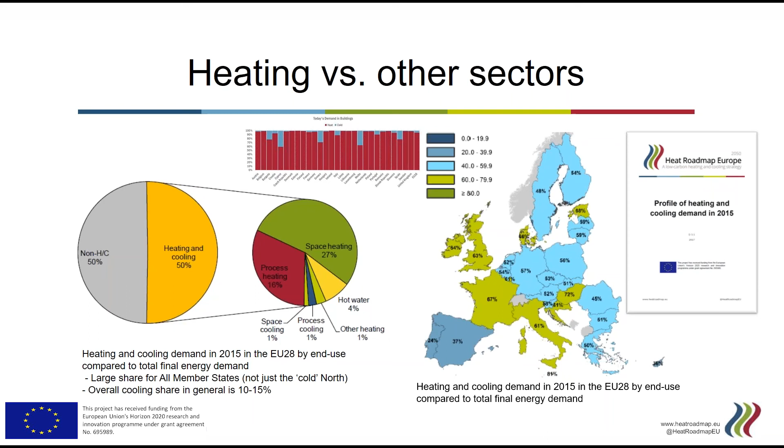Also, what is interesting to see in our initial mapping is that the cooling share in general is lower than what you would expect. Also, in those countries where you actually use a lot of cooling, we have, for example, Cyprus or Malta or Greece with rather high cooling demands, but still, even in these countries, heating is actually higher. You can go onto our website and learn more about your country. So that was the status.

And then the question is, what is it actually that we're looking into in the future? In the European Union, in member states, and in cities across Europe, we are trying to align to some long-term targets within the debate about climate change. And it's clear that the European Union put the target of 80 to 95% reductions in the CO2 emissions from the energy sector.

Then there are also short-term targets, and we have in what's called the Energy Union 5 different focus areas. One is the security of supply, solidarity, and trust within the European Union, and this is mainly focused on gas, oil, and electricity. The energy efficiency first principle, and then we have the aim of having lower CO2 emissions, and also research and innovation within, for example, energy storage or the SET plan, and these kind of elements.

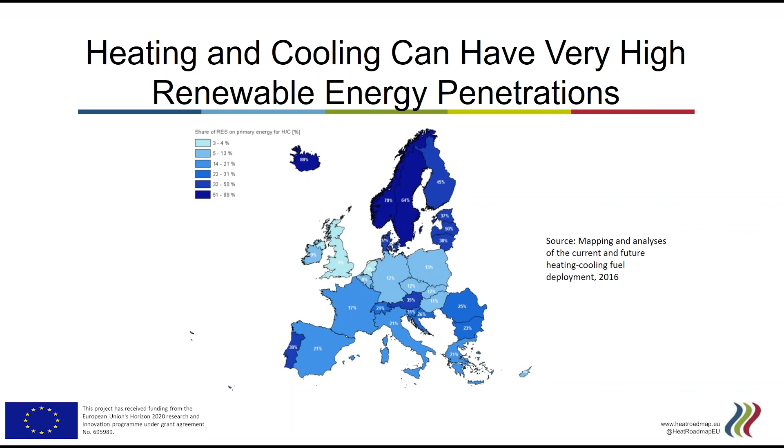If you look at the statistics, there's also a clear tendency that those countries that have larger shares of district heating are able to diversify the heat supply and have more renewable energy within the heating system compared to those countries that have low shares of district heating.

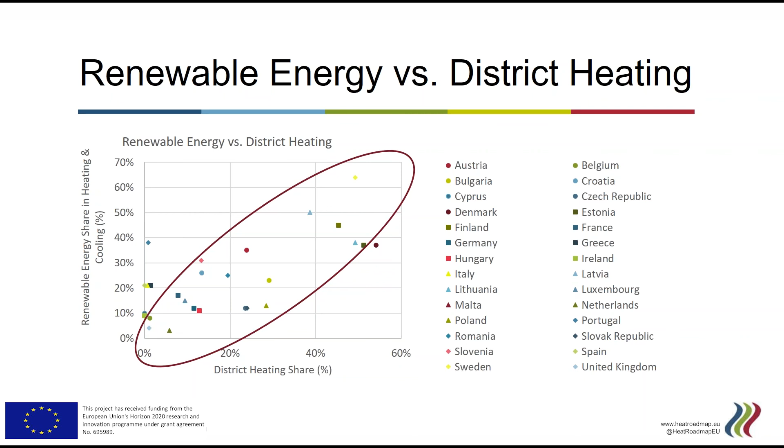So why is the heating sector and cooling sector so hard to change? Well, some of the things are connected to that heating is rather complex. You cannot simply change the legislation around the heat market as you are doing it with regards to the electricity market. Also, heating is tied up in large investments, in individual investments in buildings, which means that it requires a complex set of regulatory measures to actually address the heating and cooling sector.

Also, heating is very local, which means you have to have some local action. To have local action, you need also to have handles or some framework that you can work on the local level. Heating is long-term, meaning that if you make an investment, you will have to live with that investment for quite some time. Heat savings and district heating, for example, have very large investment costs, and this means that you have to have some security for the institution, utilities, companies who have to invest in that. For the heat savings, the building owner needs some kind of framework to invest in savings at that time when the building is being renovated anyway.

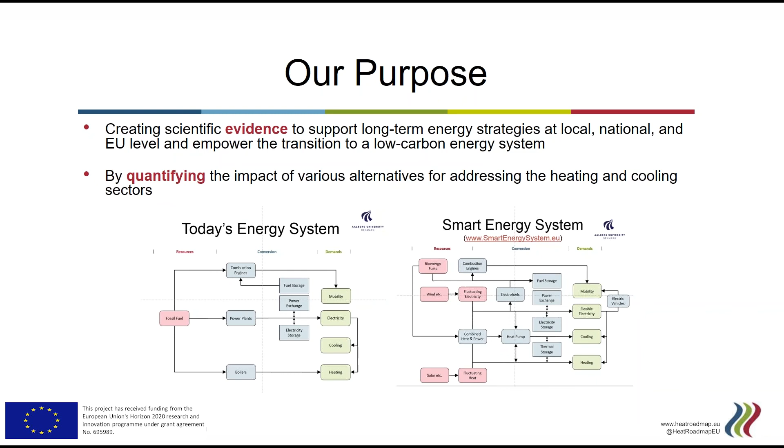This means that in Heat Roadmap Europe, to some extent, we go from the current challenges and overall energy system, which is a high level point of departure. Then we try to dig in, provide knowledge and data and analysis on a rather detailed component, technology, country level, also providing maps for a significant part of Europe. And then we end up also using this detailed knowledge to have some overall results that can be used at a national or EU level.

By having this approach, we're sure to have credibility regarding the data, regarding the analysis. We can provide knowledge on the very local level, but we can also then use this on the national or international EU level to have results for the scenarios going towards 2050.

The objective is to remove some of the barriers that we see in the heating and cooling sector by providing and quantifying what is possible. By using this data and knowledge, we try to open up the minds and markets, and we build hopefully new capacity and skills by also getting our results throughout the European Union in different workshops across member states.

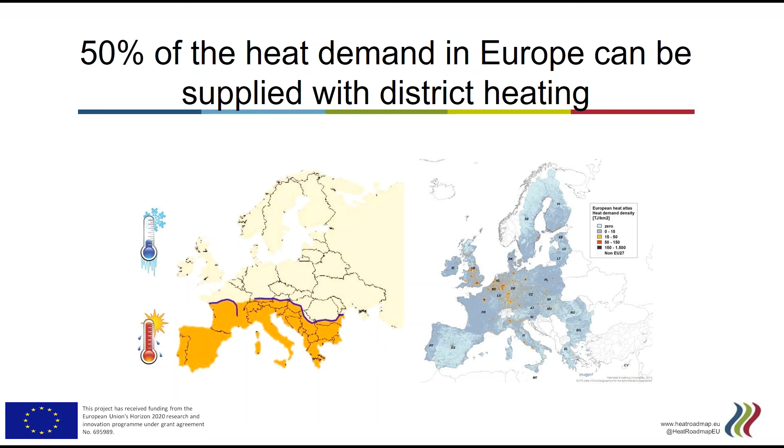When we look at the data, it is also clear that heat demand is not only in the north of Europe, it is also in many places and significant. When we look at cooling, this is not only in the south, this is actually also in the north. And the reason is that this is connected both to climate and to the different types of buildings that we have around Europe, which are different within the different member states.

Another key result from previous studies is that we have more excess heat in Europe than all of the heat demand in the different buildings. This means that theoretically, it is possible to eliminate all the use of gas or fossil fuels or electricity within the building sector if we were able to extract or collect all the excess heat and supply the buildings. Of course, this is not possible, and this is why we try to combine our knowledge regarding the energy system and the data for the heat supply with our GIS and energy mapping.

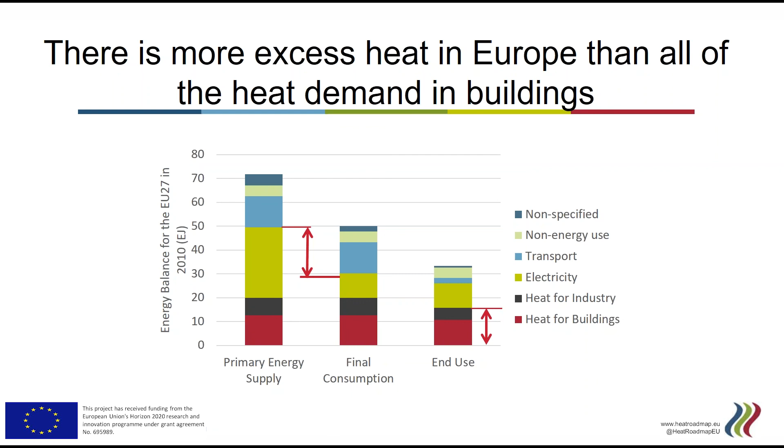Energy efficiency is certainly an important element of the heating and cooling system, but it is also clear that there is in the future some kind of balance between the cost of making further savings and the cost of supplying heating or cooling. And this is the balance that we have found for the overall European level, which is 30 to 50% savings on the heat demand across Europe. And there are no previous results for selected member states. But in this project, in Heat Roadmap Europe, we will provide this type of knowledge.

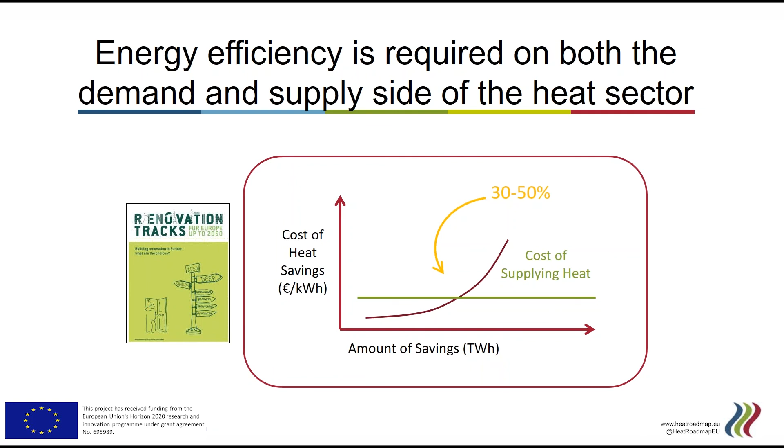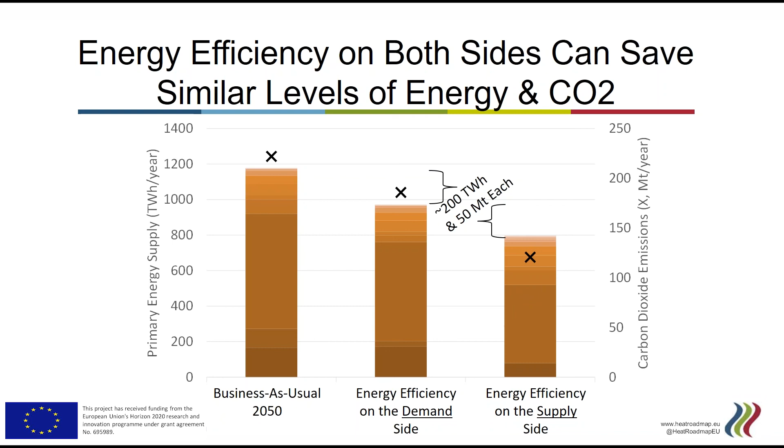When we start to combine what we call energy savings at the building level with energy efficiency by using excess heat, we can also see that there are similar savings on the primary energy supply by saving energy within the building and by providing heat in a more efficient way. This means that a combination of both doing energy savings at the building level and having a different energy system design can provide equal amounts of fuel saving. If we then are saving fossil fuels, we can actually save equal amounts of CO2 as well.

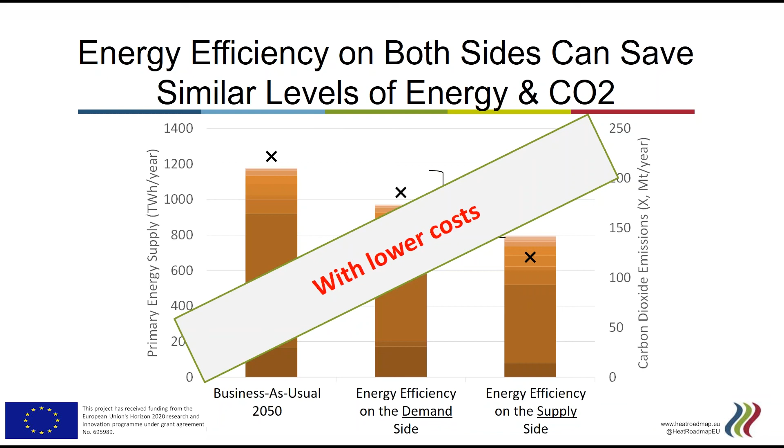The positive thing here is that if we redesign the system and combine all of these elements, we can significantly reduce the cost of the energy system as such, and certainly the cost of decarbonizing our heating and cooling supply.

So the previous results show that we can reduce the energy consumption significantly, reduce the imports of fossil fuels to the European Union. We can reduce carbon dioxide emission and reduce the energy cost while increasing renewable energy and potentially increasing the number of local jobs within these sectors.

We have found this in the 3 previous Heat Roadmap Europe studies, where we have been moving from illuminating different possibilities within using local heat sources through district heating, combining a comprehensive heat strategy with energy savings, and now in the 4th study here, we're moving into low carbon heating and cooling strategies for the 14 member states.

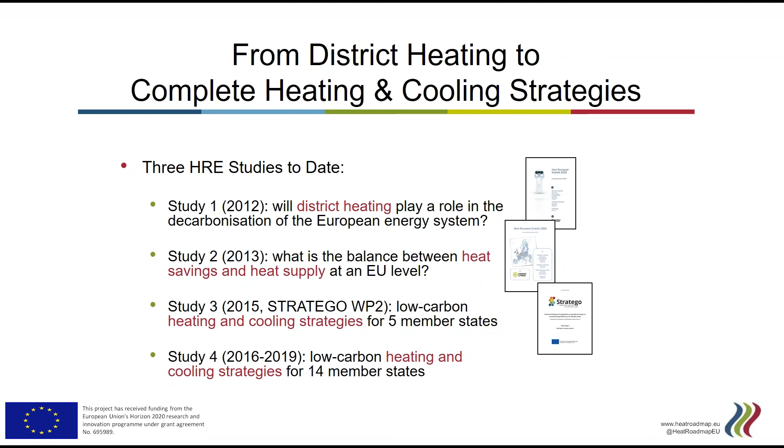So what we try to do is on the very local level is to quantify the energy consumption, the energy costs, and the carbon dioxide emissions. And as I said, the key results will be pathways towards 2050 about what should be done technology-wise, and to what extent there is a balance between using individual solutions, district heating solutions, gas solutions, and energy saving solutions within the building sector.

This requires some substantial data and mapping, where we then have a large focus on looking at the potentials to save energy within the building sector and the cost of making these savings. We combine that with looking at maps and identifying different potentials for district heating. We look at the heat sources that we can use locally, and then we identify that on an energy system in order then to make energy system analysis to create detailed hour-by-hour scenarios and strategies on the different member states.

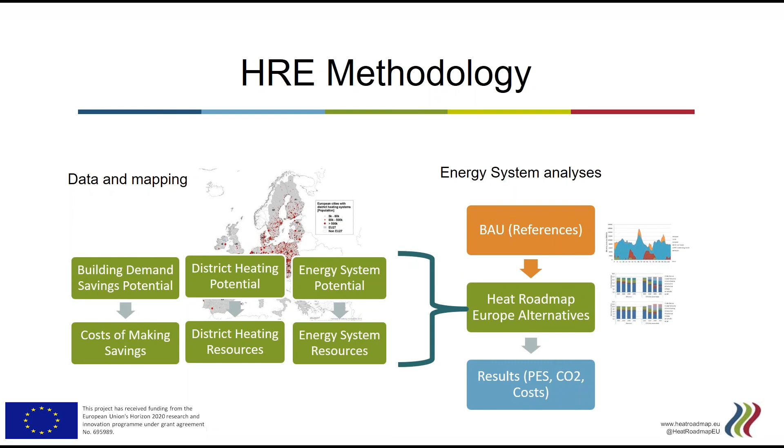Within the project, we have a complex relationship between different energy models. We have some energy models that look at the heating. This is the PETA, the Pan-European Thermal Atlas, and it's the forecast model where we look at buildings and industry in a transition. And then we have another set of tools or models which is looking at the energy system in great detail, which is the JRC EU Times model combined with the EnergyPLAN hourly energy system analysis model.

Using this, we can look at both single years, which is what is being done in the mapping and in the EnergyPLAN tool. We can also look at the transition between 2015 and 2050. And then by combining all of these different tools, we're able to make comprehensive, detailed roadmaps. Now I'll try to make some examples for you about what it is that we're actually trying to address.

Here is an example of the energy mapping, and here is a map of the Netherlands. And what we provide on our webpage is the Pan-European Thermal Atlas, where you can look at the heating and cooling demands in an interactive web page where you can zoom into your region or city or country. So these are some of the layers in the mapping. We also have mapped the different renewable energy heat sources, for example, potentials for solar thermal, bioenergy, or geothermal.

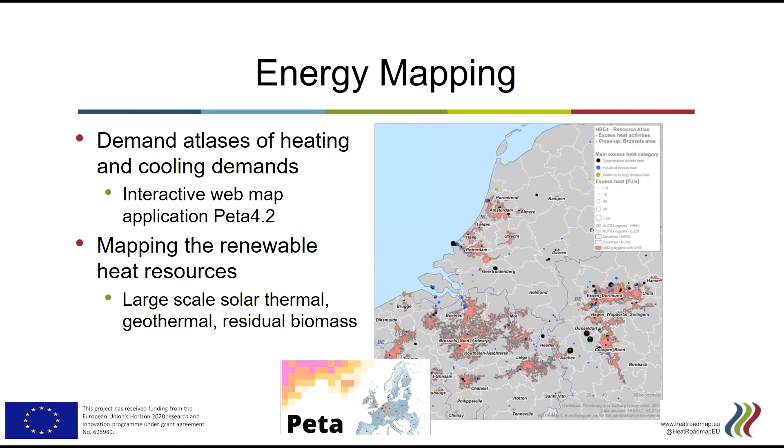And if we zoom in a bit, we can see here how this looks on an example for how much district heating is used in the different settings across Europe. Here on the right, you see Copenhagen with more than 90% district heating, and London with 5% district heating. And on the map, it's not district heating that is looked upon, it is actually the energy density in the cities.

So what you can see in the purple is parts of the city, 100 by 100 meters, where you use more than 300 terajoules per square kilometer. And then the red dots are areas where you use above 120 terajoules per square kilometer. And this changes how feasible it is to do energy savings, how feasible it is to do district heating.

And immediately what is striking when you start to look at these maps is that there are really huge similarities across Europe regarding the heating and cooling demands, but there are also huge differences in regards to how much renewables and what kind of solutions there are across the different member states.

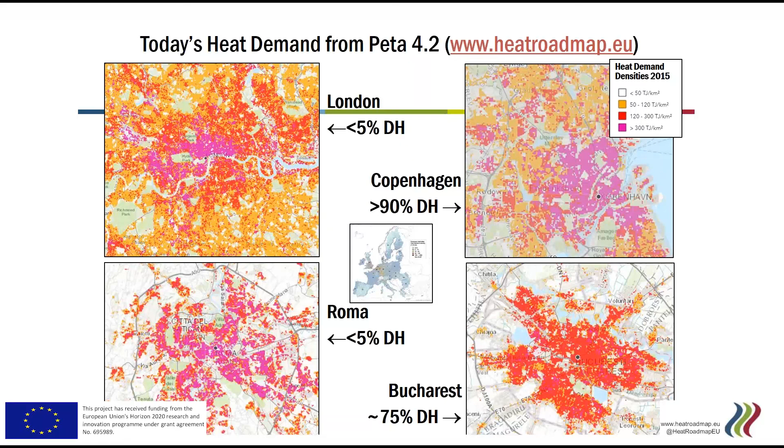Another example of some of the key results already obtained is here from the Pan-European Thermal Atlas (Peta) maps, an example from the Netherlands. Here we can identify heat demands of around 300 petajoules per year, and we have excess heat in the Netherlands to actually cover almost twice that much.

Of course, this excess heat is concentrated in a few areas, and you can go into our maps and identify whether your area has a large excess heat potential. But looking at the overall level, it is counterintuitive that a country like the Netherlands does not have a higher district heating share, knowing that the excess heat is so extremely high.

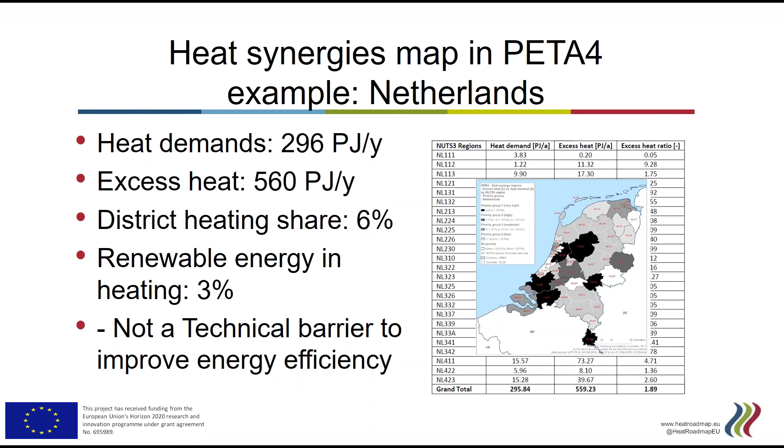Another part of the energy mapping is the possibility to use what we call the heat synergy regions, meaning areas with a large demand of heat and a large potential for excess heat sources, and to look at how much the costs actually could be for creating new networks.

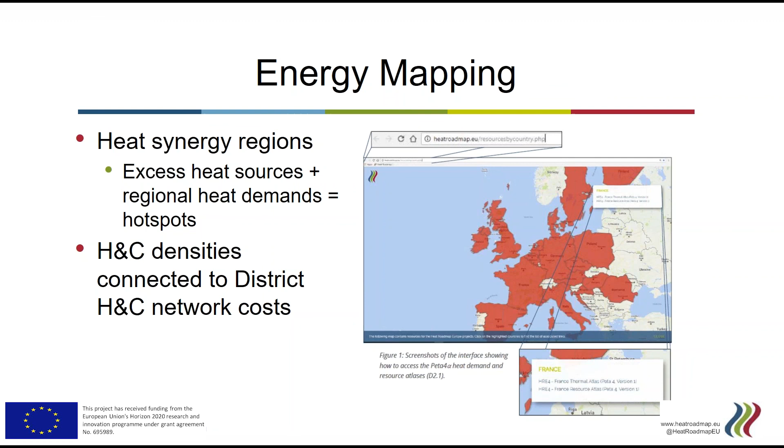In the coming months, in the Heat Roadmap Europe project, we will be extending these options to not only look at the costs of this one technology, but actually looking at how the local area looks when we look towards 2050 with the different elements that we are analyzing on a more energy system level.

The other part of the project is profiling the energy demand. In the beginning of the webinar, I showed you some details regarding heating and cooling as part of the overall system. But if you go to our webpage, you can find country profiles for the 14 EU countries with the highest heat demand, and have a look at what the heat supply looks like for the residential sector, the services sector, or the industrial sector.

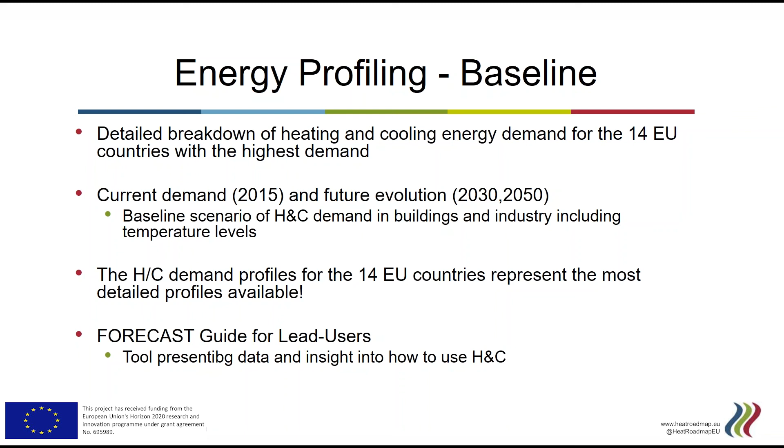What are the different possibilities, or what are the different technologies being used? And there are also reports regarding how the heating and cooling demands are expected to develop towards 2030 and 2050.

In the project, we also have quite a significant focus on energy savings, and here we are looking at what the costs actually are of doing savings within the different buildings in the different member states. So for all of the 14 countries, we have created what we call cost curves for reducing the demand in buildings and industry.

This means that we can use this data for the costs of the different options for reducing the demand and combine this with the energy system analysis for actually supplying heat or electricity for these sectors. And when we have the results, we will try to identify some balances between how many additional savings should be done compared to supply.

Overall, it can be extremely hard to know in which direction everything is going. Will there be new technologies? What will be the role of combined heat and power? What is the role of insulation? Should we produce hydrogen to push out the natural gas in the heating sector? What about biomass boilers or smart grids? Some of these questions are those that we are trying to address with the different set of scenarios and analysis we're doing for the 14 countries in the Heat Roadmap Europe studies.

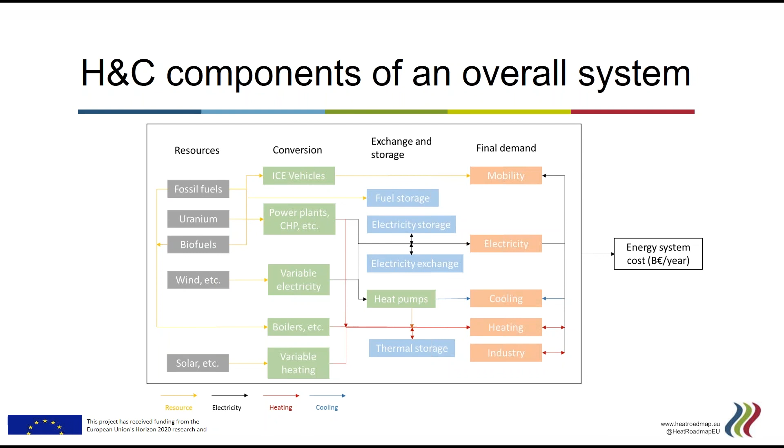If we take the example of heating, you can see that heating is on the bottom right here. What we can see is that right now we're using boilers or fossil fuels to provide heat for the buildings, and to some extent there are some thermal storages also involved.

In the future, we will most likely use a lot more wind, which means that the electricity sector will be engaged, and we can start to stop some of the burning of fossil fuels, which means that the different components outside the actual heating sector will be depending on how we use heat and what kind of infrastructure we have on the individual level.

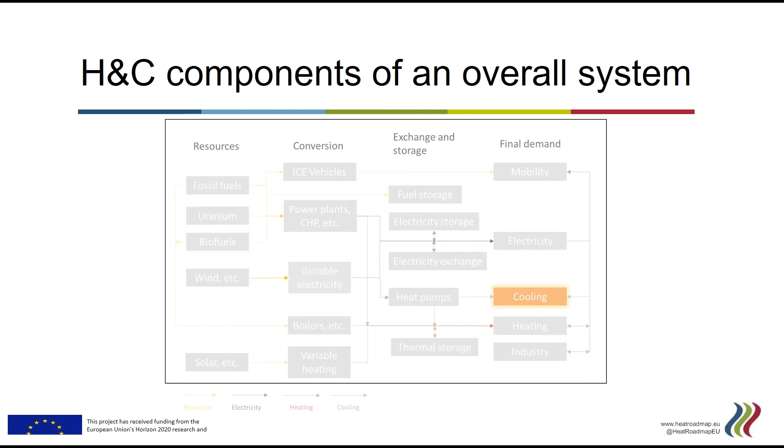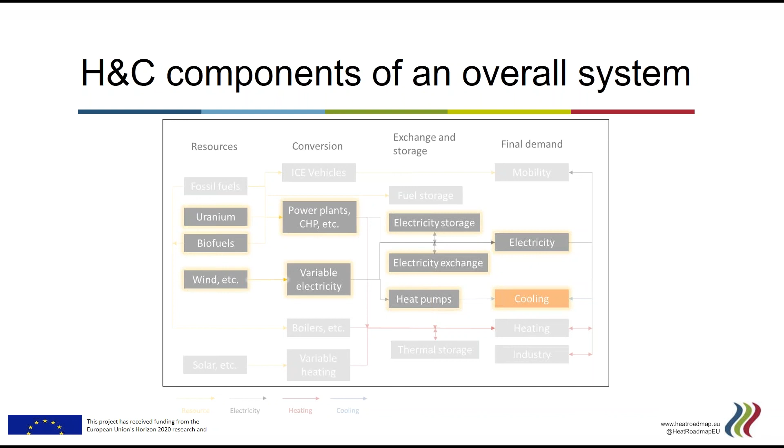For cooling, we can look at the same kind of components, where currently we're using electricity for heat pumps. And in the future, what we want to try to provide is more renewables into the heat sector or into the electricity grid, and then to use this also in combination with storages.

When we have these components in the system, it also becomes important not only to look at what happens between now and 2050, but also to understand what happens within the actual year, not only in the year, the month, or the week, but hour by hour within the year. This is necessary to understand the role of the different components.

The option to store, for example, heat when there's wind energy, and to use heat in the buildings when there's no wind. And it becomes very important when we look at the balances between energy savings and the energy supply. From the past studies, we have so far on the overall level identified huge potentials for doing savings. And as I said before, 30 to 50% on the overall level is recommended.

Then you can divide between urban areas and rural areas, and we can see that in urban areas we should have more district heating. This is where you have high heat densities, you have a neighbor, you can see your neighbor, and in this regard the overall results are that at least 50% of the heat demand can be provided by district heating. In rural areas, it is recommended to have electric heat pumps,